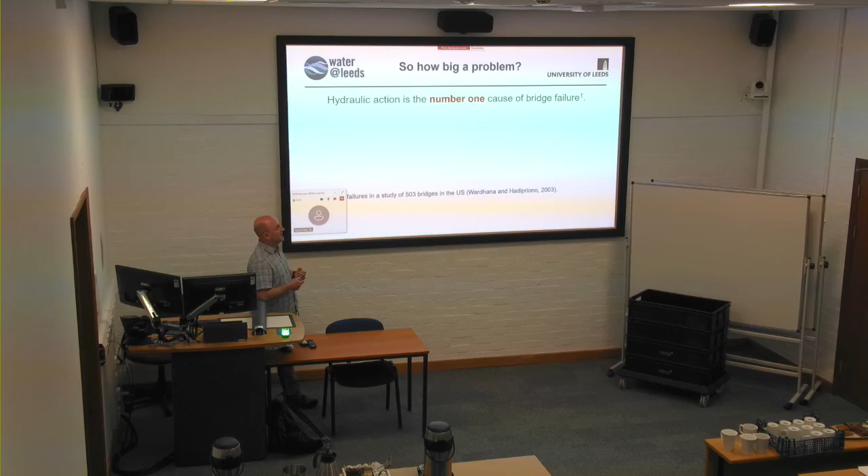But when we look at the research into bridges, what we find is that hydraulic action - essentially the water interaction with the bridge, whether loading from hydrostatic forces, or scour, anything to do with the water context of a river bridge - is still the number one cause of bridge failure. That in itself makes us wonder whether we really know the full picture yet.

The other interesting thing is that even where we have a process to assess the risks to a structure like a river bridge - for example, we work with Network Rail, and they have a whole process to assess risks and rank them into low, medium, or high - what we find is that even bridges that fail are quite often assessed as low risk. So you start to think, well, if our risk assessment procedures are not allocating bridges correctly, are we missing something?

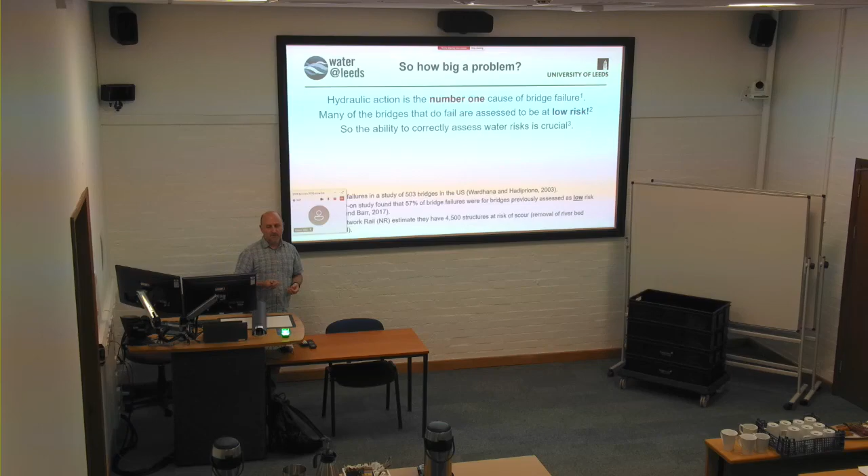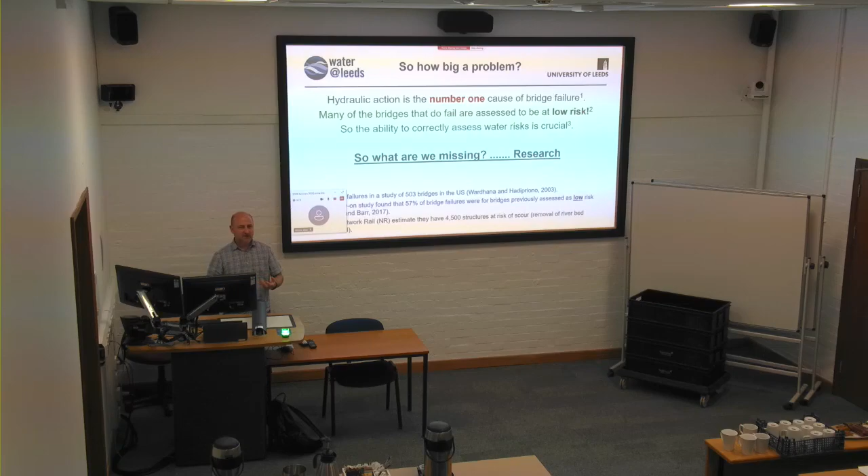And there are a lot of bridges - we're talking about thousands, tens of thousands of bridges across the UK that different asset managers look after. So that's the context of this talk: what are we missing? Is there some amazing research that we should be doing? That's kind of where this came from as a project, I guess.

So the location of the study is Dominica, in the Caribbean. It's known as the Nature Island, and it's very pretty. It's quite a small island, only 750 square kilometres. It's very steep, with three main volcanoes in the centre - a very steep system. And it has 365 rivers, one for every day of the year, as they like to boast.

And so there's lots and lots of bridges. So you can probably see where the context of this is going a little bit. And unfortunately, hurricanes are very common in the Caribbean. And what we're interested in this talk is how these bridges perform under those hurricane conditions.

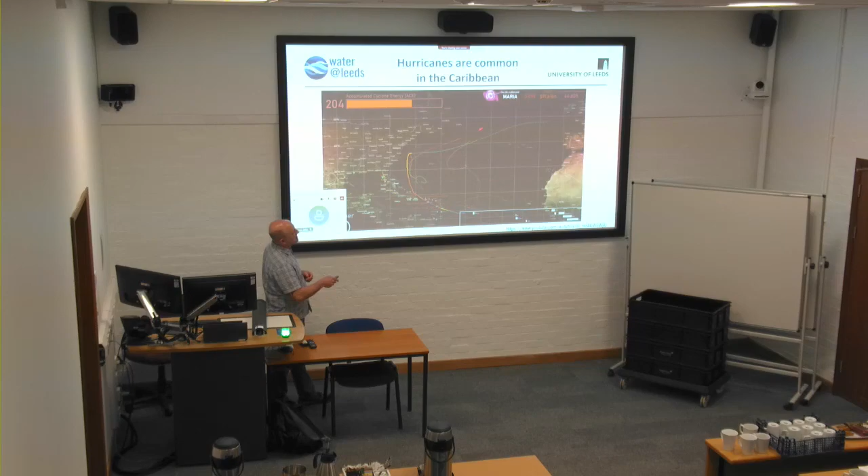So here's the path of Hurricane Maria, which went across the Caribbean. Interestingly for later, notice that the tail end of the hurricane heads towards the UK, so that will come up later in the context. Although we're studying Dominica down here, we're also interested in the fact that the tail end of hurricanes ends up hitting the UK.

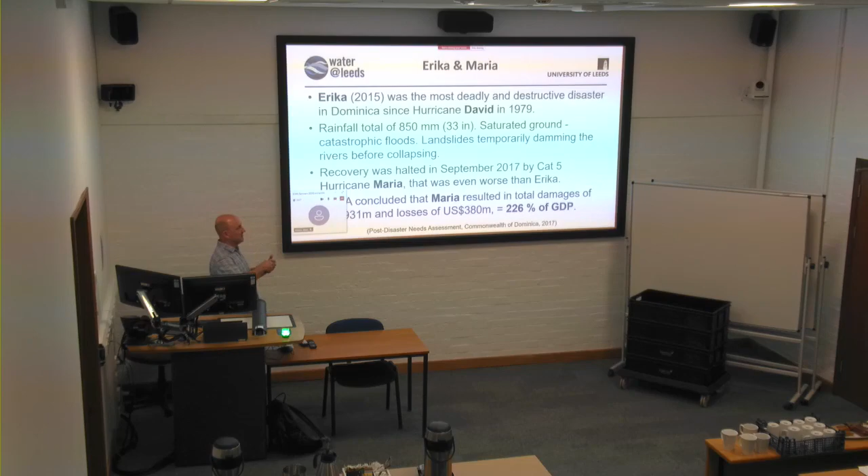So in the context of this project, it was about 2019 we started, we finished about 2022, so it was a long-term project. Just when the project came in, the island of Dominica had experienced a tropical storm, not a hurricane - there's a subtle difference, but essentially it's a very extreme weather event, lots of rainfall, slightly less wind in the case of a tropical storm, but similar intensities of rainfall, 850 millimetres in about 3 days.

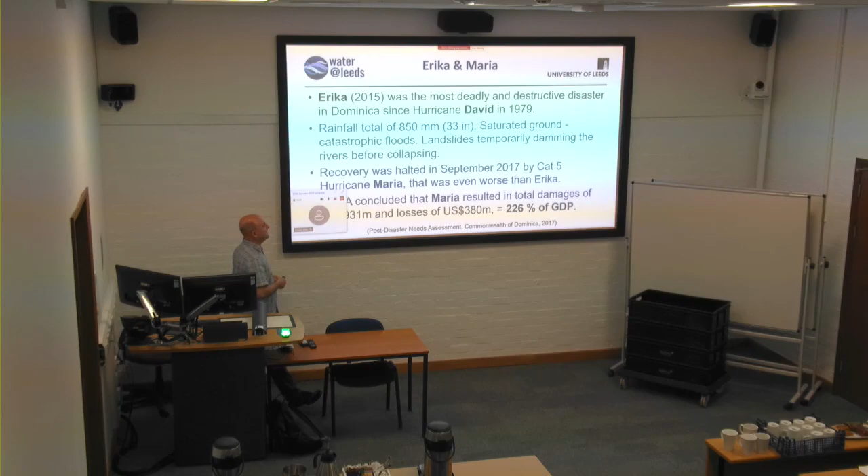Lots of landslides, damming rivers, collapsing, and so catastrophic floods. Unfortunately, as they were trying to recover from that, they were hit by a Category 5 hurricane, Maria, in 2017. So they were just starting to get themselves back together, starting to reconnect the road system and so on, but unfortunately got hammered by Maria.

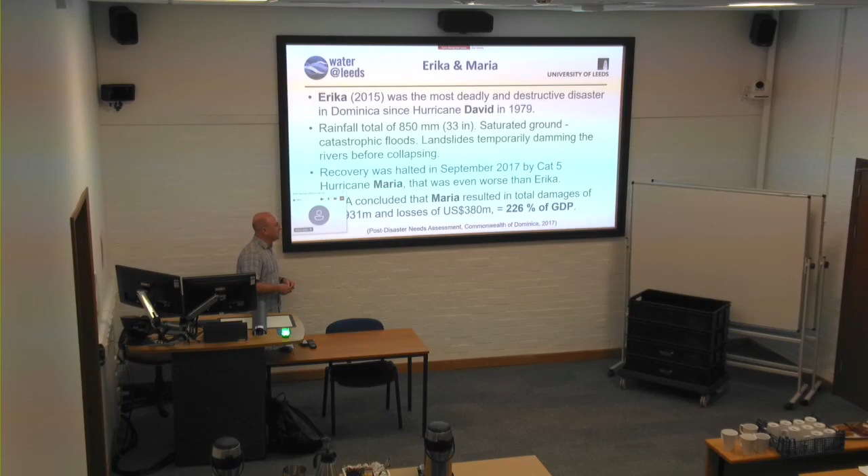And they estimate from the post-disaster needs assessment that they put together after these disasters that something like 200 plus percent of GDP was lost during that event. So you can imagine if you're a country and you're basically set back 2 years in terms of your income and your investment - a huge impact on the island.

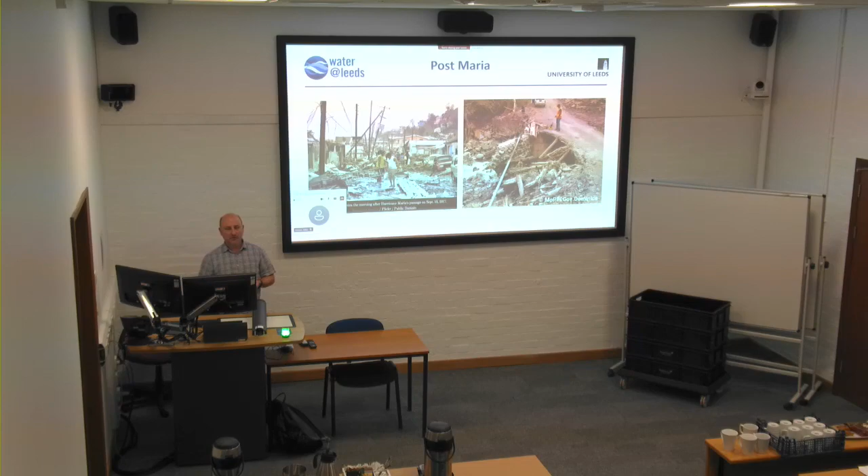And another picture of another bridge - this one survived. But notice, let me go back one - notice the large boulders here that were brought down, and then a lot of the woody debris. These are the trees blown down during the hurricane, get swept into the river and then clog up the bridges as well.

This is the capital Roseau. This is one of the bridges looking up to one of the other bridges. I'll just show a video - hopefully this will come up on the other screen.

Hopefully everybody can see that. So this is about 2 weeks after the hurricane. We're looking at the main river in Roseau, which is the capital, and you can see the debris blocked up against the river. We'll come back to that log there.

But the sediment as well is built up, so the channel was a lot deeper than this previously, so the clearance now underneath the bridges is very small. And you can see woody debris that's jammed up against the bridge, piled up against the piers. This log's a particularly important one that we'll come back to later, but all this woody debris has been swept into town - that's arrived on the flood water that filled the town.

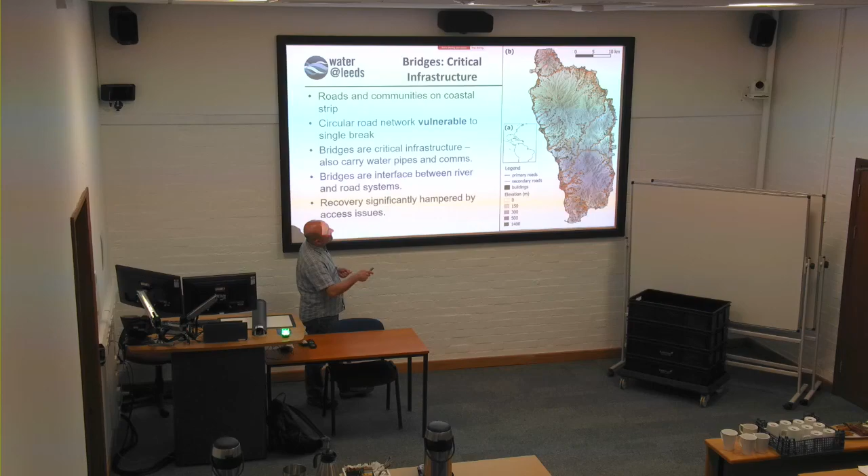Okay, so you can see the kind of challenge for bridges. But if we take a step back and look at the island generally, you can see this is the road network here in the island. You can see that because it's quite steep, there's about 3 volcanoes here, so very steep, about 1,400 meters high in the middle of the island.

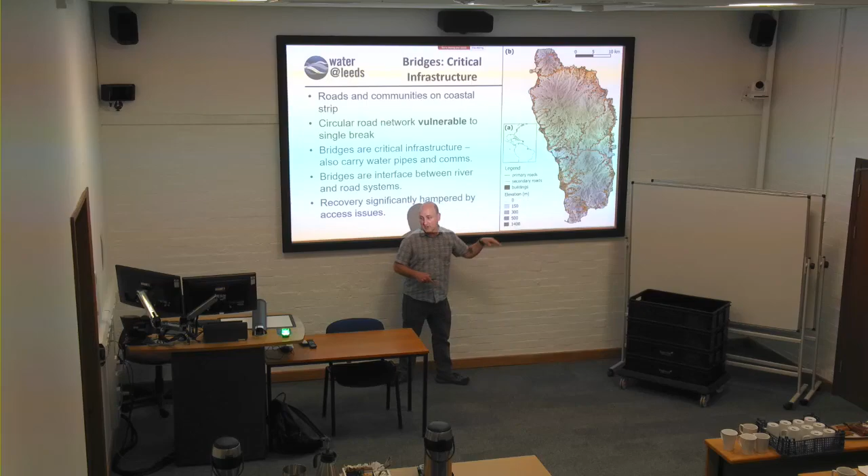And what you end up with is a road system and a sort of community concentration along the coast here. So you get lots of people living on the flat areas on the coast, which are also alluvial fans if you're into geomorphology - essentially a lot of sediment deposits over the years, and they are prone to avulsion as well, so the river channel changes quite quickly and quite frequently during these sorts of events.

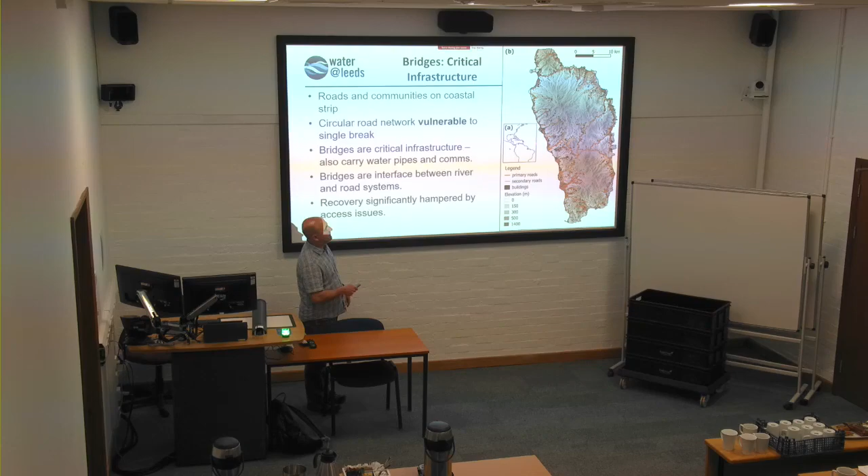And of course, because they've got this kind of circular network, there's only 1 or 2 roads that go across the island, and they take a long time to get over because they're quite steep. Any break in that road network disrupts access, and that was a huge problem during the recovery phase - getting to communities where they needed support was a real problem.

So how did I get involved in this? This came about as part of a World Bank project. They were looking, post-Hurricane Maria, to make a loan to the island to help them rebuild their infrastructure. But they were acutely aware that they'd already experienced something similar two years before. So the question was, are we just going to keep building bridges and having them washed away? Or is there something we can do about it? Is there something we can learn from the experiences of this context?

I got involved initially as a kind of hydraulic reviewer of the consultants' work that was going on. I then convinced them that it would be useful to have a resilience research project alongside, where we would try to gather our understanding of what actually happened and what could be done about it in the future. How could we improve resilience, particularly of bridges?

They were also quite interested in using drones to fill data gaps. There's not a lot of data available on the island. Certainly at the time there were no river gauges, there were one or two rainfall gauges, but they had intermittent records, so there was a real problem with data. That was kind of the context for this problem.

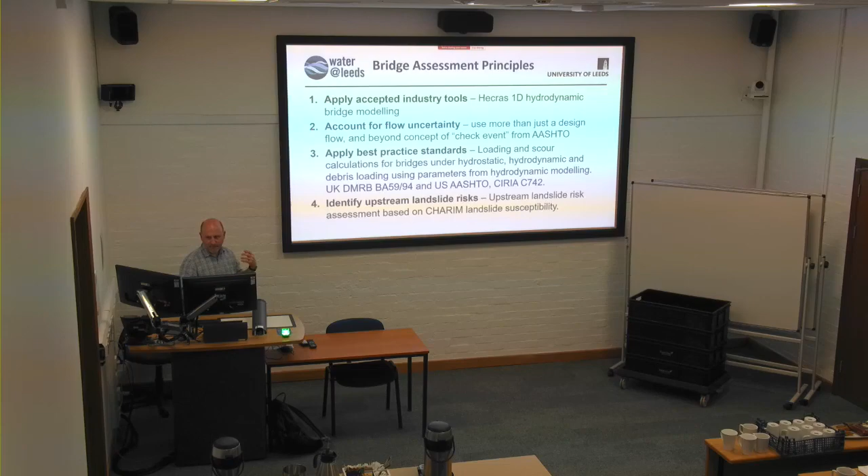So we set about studying this as a learning exercise, and in negotiation with the World Bank, these were the assessment principles we came up with. They were very keen on using whatever the consultants were using. They didn't want us to use any fancy research models. They said, you've got to follow the practice that the engineers are doing that build these bridges, and then we can learn from that process.

So we ended up applying, at the time, HEC-RAS 1D hydrodynamic modelling, which works quite well for these bridges. They're quite simple river systems, so 1D cross-sections work quite well.

They wanted us to look at flow uncertainty. At the time, you would have a design event, which might be a 1-in-100-year flood peak that you would then design your bridge to. AASHTO guidance from the US had brought in something called a check event, which is a much bigger event than your design event that you're supposed to check your design under. We were interested in doing something more than that, which is to model it under a whole range of flows. I'll come back to that.

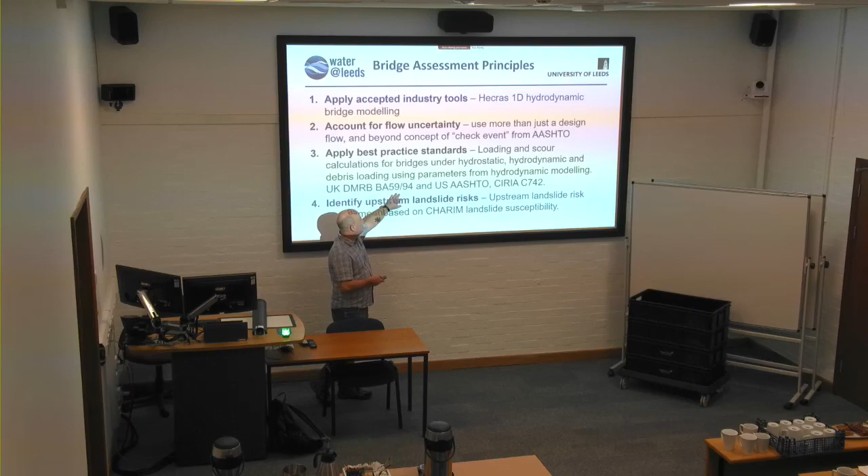In terms of calculating loading and scour for the bridges, we followed, at the time, the Design Manual of Roads and Bridges, BA 59/94. That's now been replaced, last year or the year before, but I'll come back to that. We also looked at US AASHTO guidance as well.

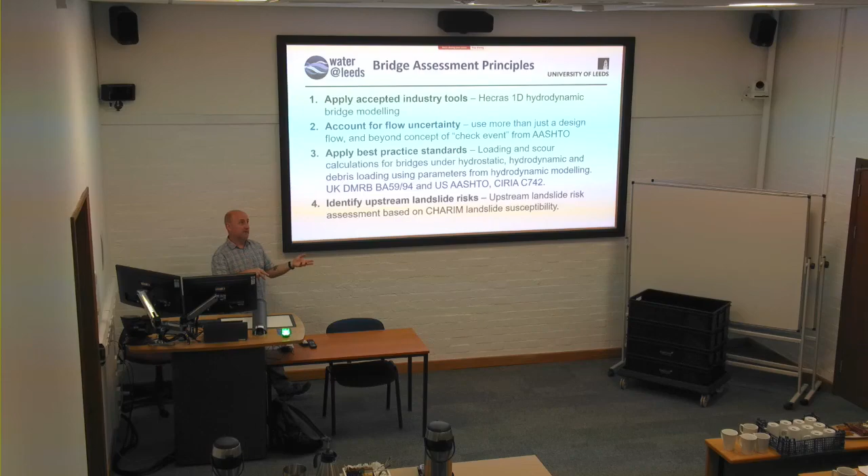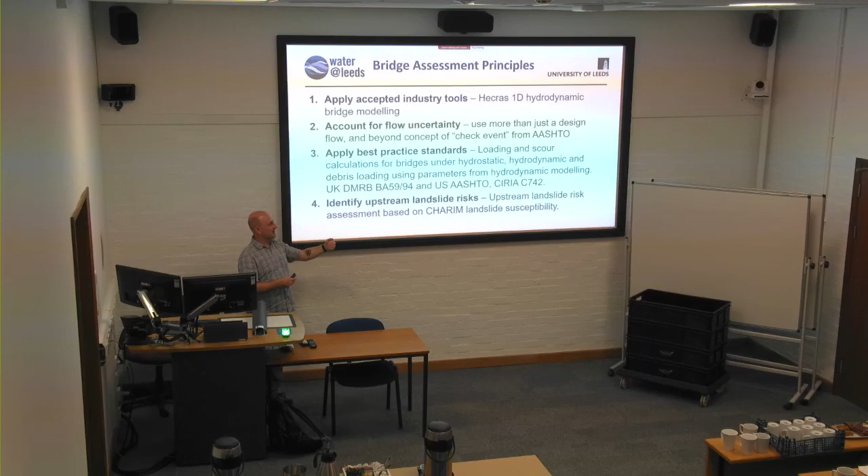They were particularly interested as well in identifying upstream landslide risks. They'd had a hydrologist do a modelling study and then a field study where they'd gone and measured wrack marks, and worked out that the flows in some of the rivers were three or four times what the model was predicting for that rainfall. It wasn't a model calibration problem - there was a process happening that wasn't in the model, which is these landslide dams building up water behind them, then bursting, producing this huge flow downstream which wasn't predicted by the model. So quite a complex situation.

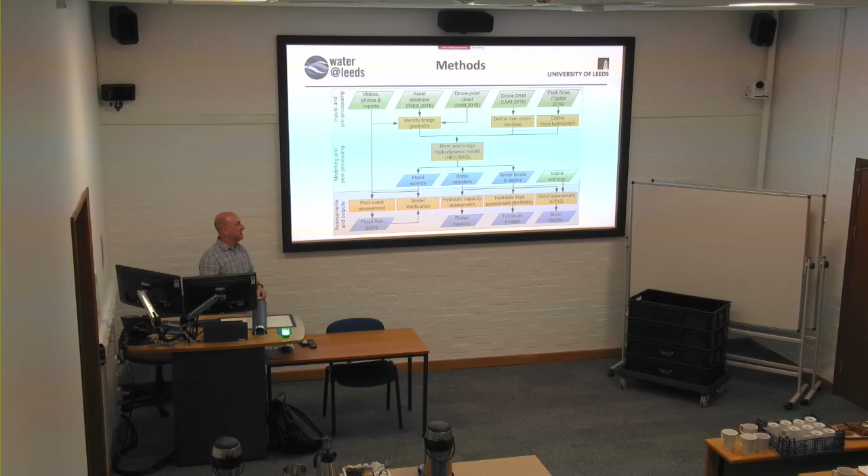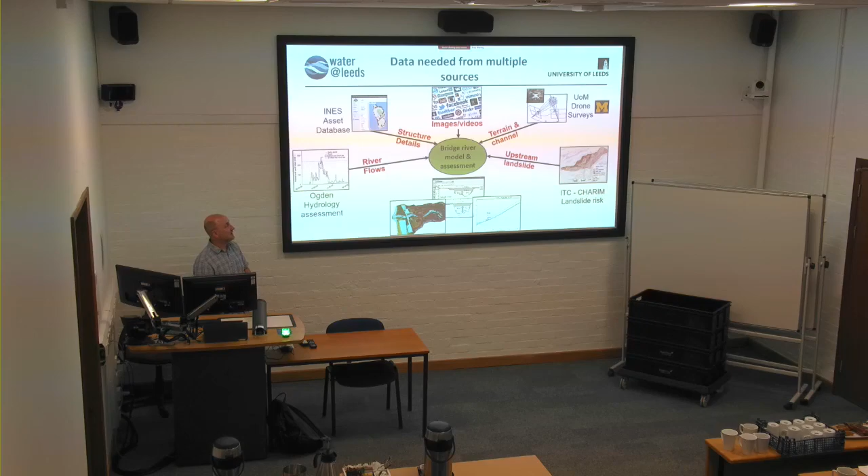Here's another way of looking at that. We had to be quite innovative in trying to get information from wherever we could get it. It was quite manual in collecting a lot of the data, certainly from social media and things. But as you saw from that video, there's a lot of information out there if you look.

So the starting point for the river modelling was to build a digital surface model, and we were working with the University of Michigan, who had a drone expert. At the time that was quite a new thing, to create your digital surface model, and he was doing capacity building with the local government office as well, so that they could do this in the future.

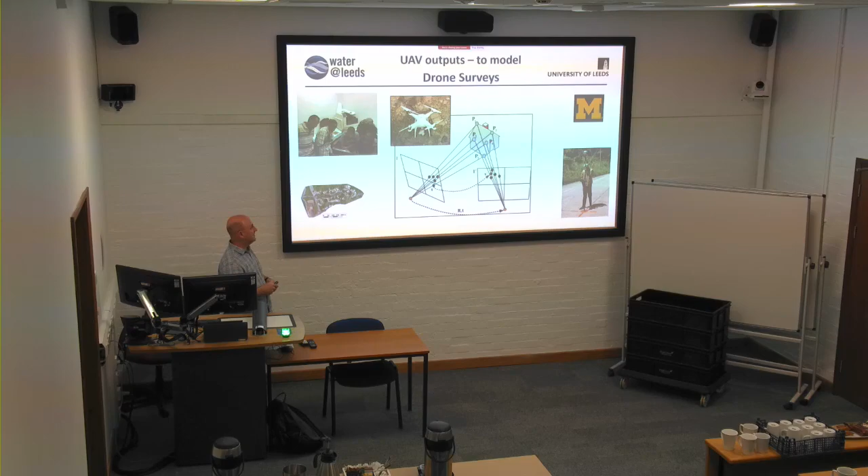So they would fly a drone above the reach of interest. Here we've got a bridge, this is the coastal edge, and this is the road that goes around the island with one of the bridges on it. They were flying drones before Hurricane Maria, which was quite interesting - the timing was like a month before the hurricane arrived. So we'd actually got it before, and then they also did some studies afterwards, but we weren't looking at that specifically - that was more of a geomorphology assessment.

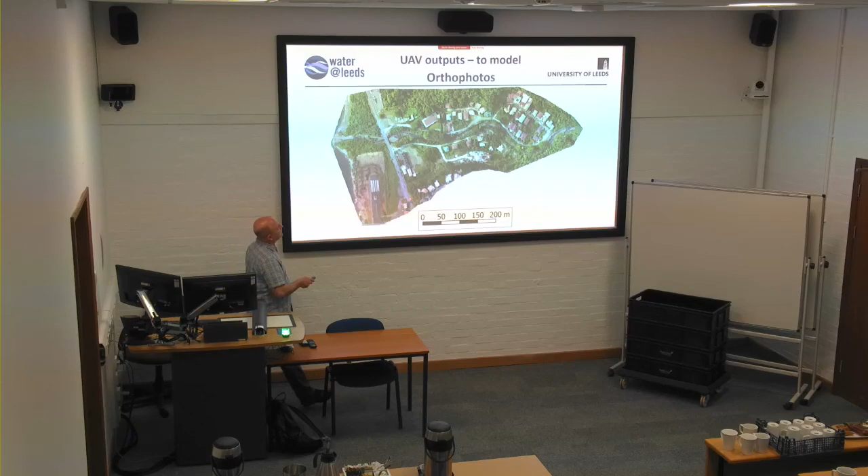But they produced these ortho photos, very high resolution, that we could use. And then they processed those to create a digital surface model, and you can see that we've got the bridges in that model.

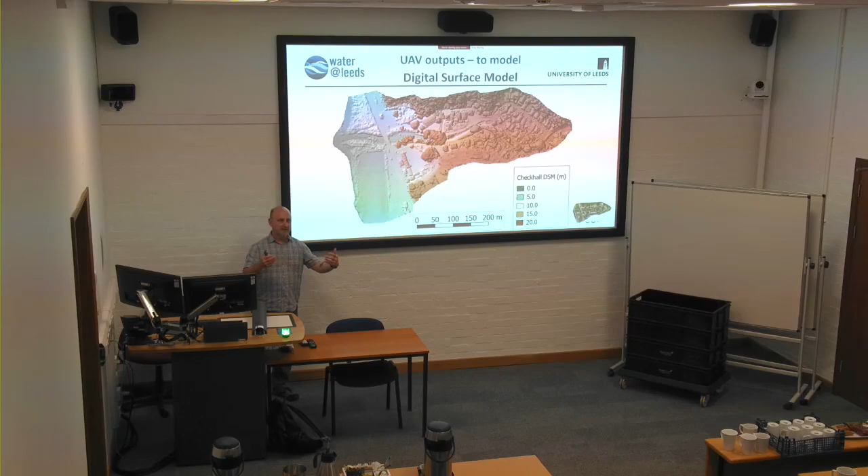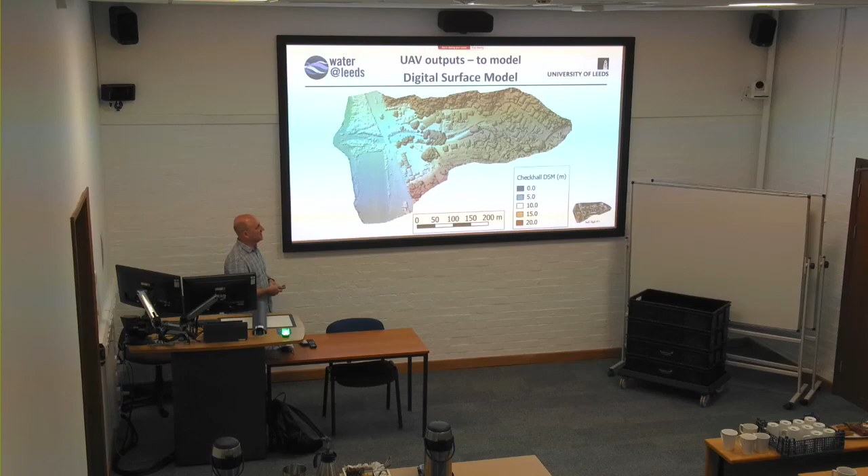This was slightly new to me at the time. I was quite used to commissioning a river survey, where people would go out and do a cross section here and so on, and we would have a very good definition of the channel. So this, although it was much higher resolution and more 2D, brought all sorts of issues to do with trees blocking the river channel view. So we had to do quite a lot of manual editing of these. Although it was a great new data set, it caused a lot of headaches in terms of manually editing everything, so it wasn't quite as automatic as we'd hoped.

But we were able to use that to create a 1D river model. You can see the bridge here in the model, so it's a simple cross-section thing. We would put a flow in at the top end, it would calculate the water level, and we would also have the structure explicitly in the model, which I'll show you here.

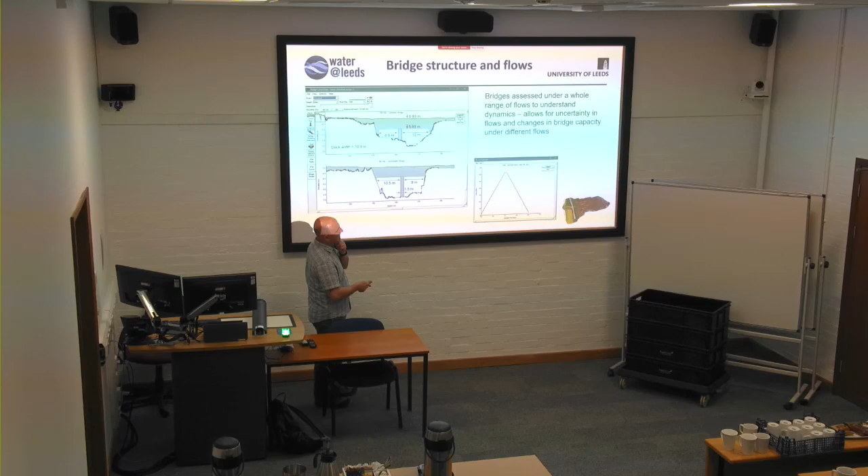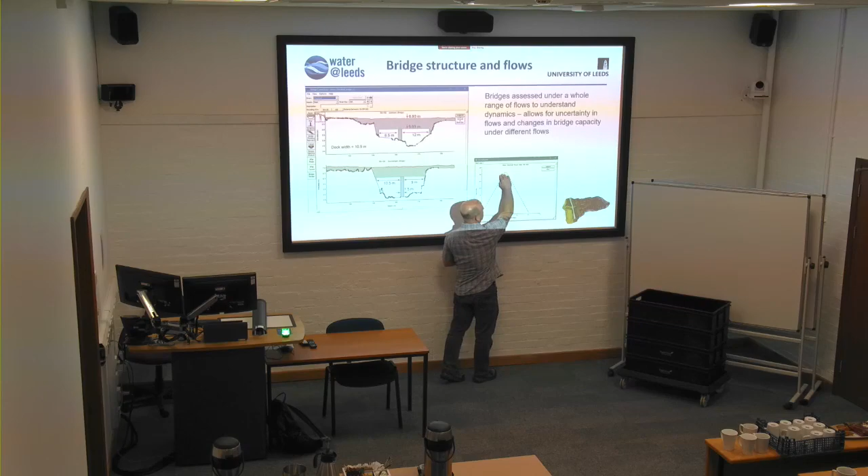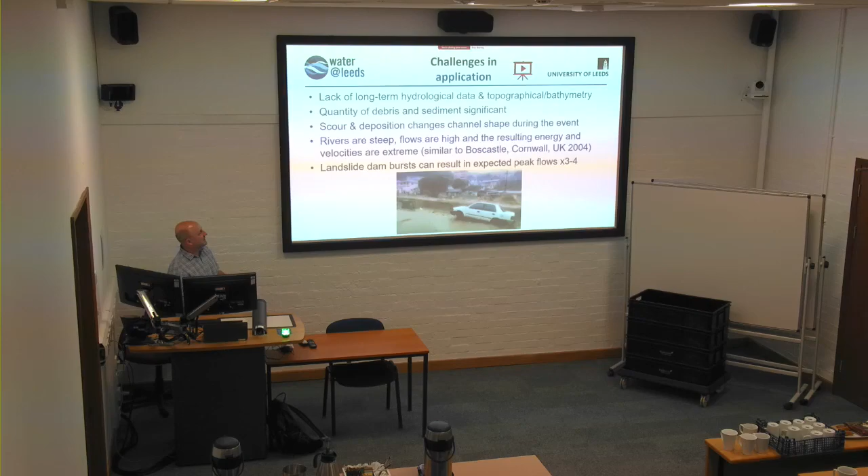So some of the challenges we had, already mentioned, lack of data - often a serious challenge. The quantity of debris and sediment was massive, you've seen the photos and the video. Scour and deposition changes the channel, and the modelling tools we're using do not allow for the channel to change, or they traditionally haven't - they have evolved since then. And we get these very steep channels, and I'll show you a video of one of the rivers during Erika. Let's see if I can find that.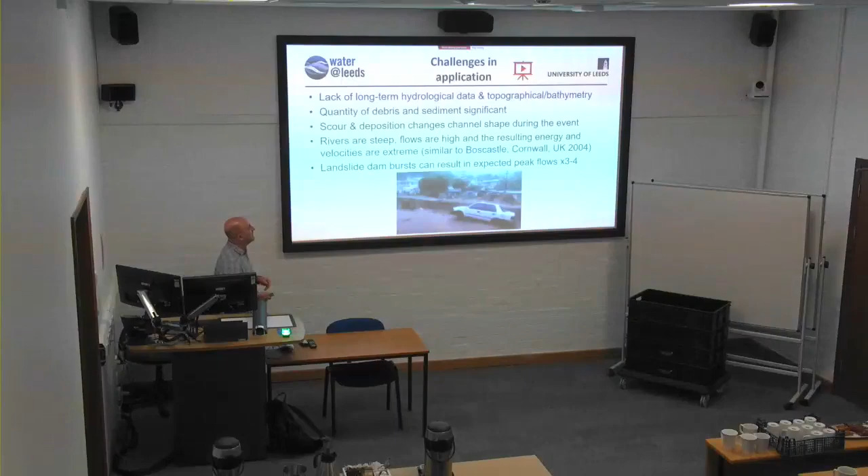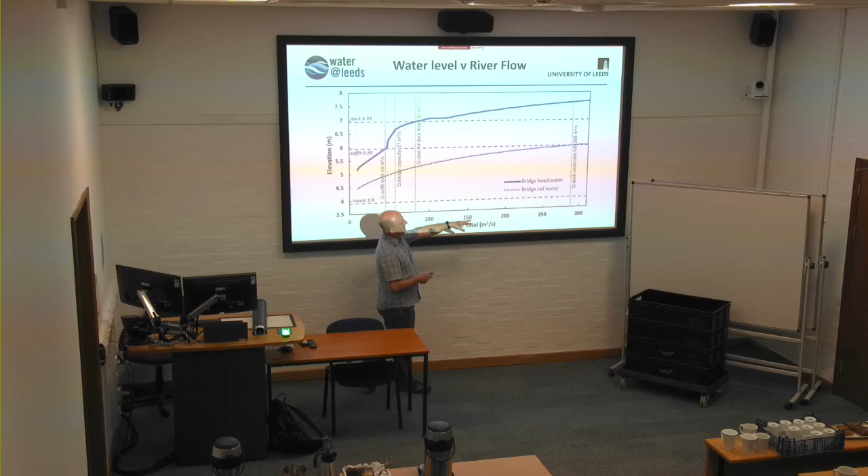Going up to 300 cubic metres per second. This is only a small river, by the way, only about 4 metres wide or something. And then you've got the elevation of the water surface on the y-axis. You can see I've plotted the deck level and the soffit level of the bridge, the top and the bottom of the bridge deck, and the invert of the channel as well.

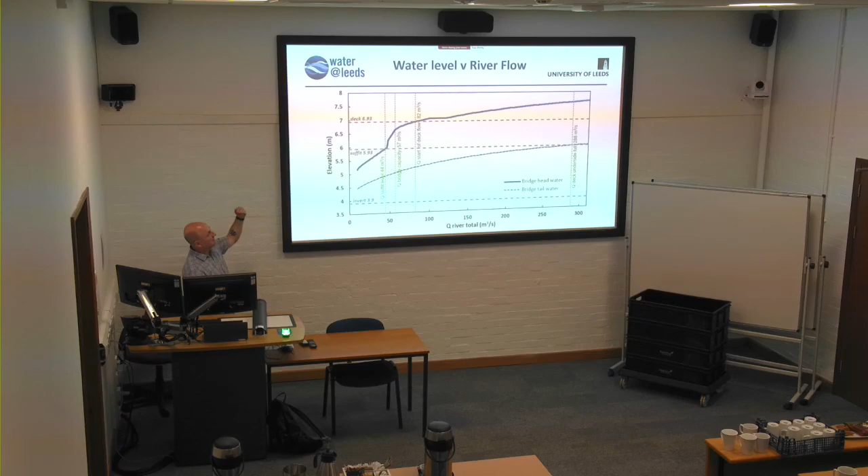You can see two blue lines. The top one is the headwater, so that's the bridge water level, or the water level upstream of the bridge deck. And the dotted line is the water level downstream of the bridge deck. By modelling it under the whole range of flows, we're able to work out exactly what goes on during the event.

You can see as flow increases up towards 50 cubic metres per second, water levels go up fairly linearly, and then it hits the soffit, and essentially water becomes constricted through the bridge, and you get this backing up of water. The afflux builds up until eventually the water goes over the top of the deck at about 82 cubic metres per second.

So you can see what's going on there. There's a kind of active area of flow where things change rapidly, and then you can see the downstream water level also eventually reaches the underside of the soffit. Because it's quite a steep river system, that doesn't happen until quite high flow, and by that time you've got a huge quantity of water going over or around the bridge system.

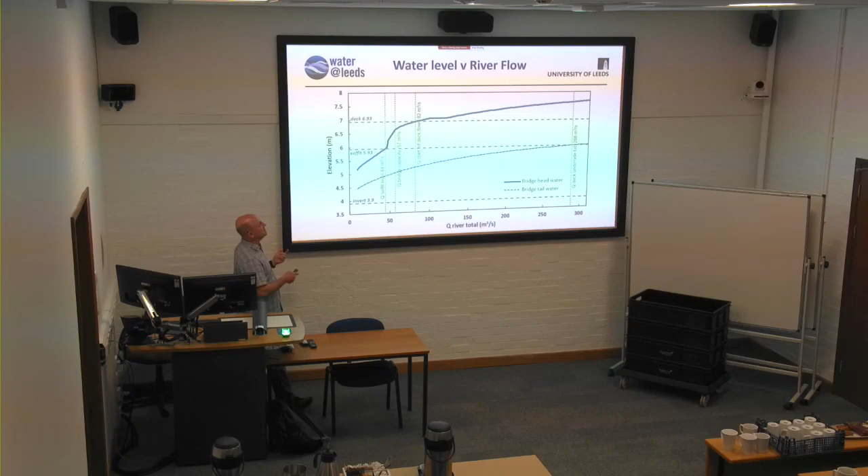The reason this was quite important is that the procedures for assessing, for example, scour, ask you to pick the peak velocity that the bridge experiences at peak flow. But actually the reality is, from what we found, you could get higher velocities before this condition. Often the highest velocities were here just before it hit the soffit level, because once it hit the soffit, water was backing up and essentially the velocity drops.

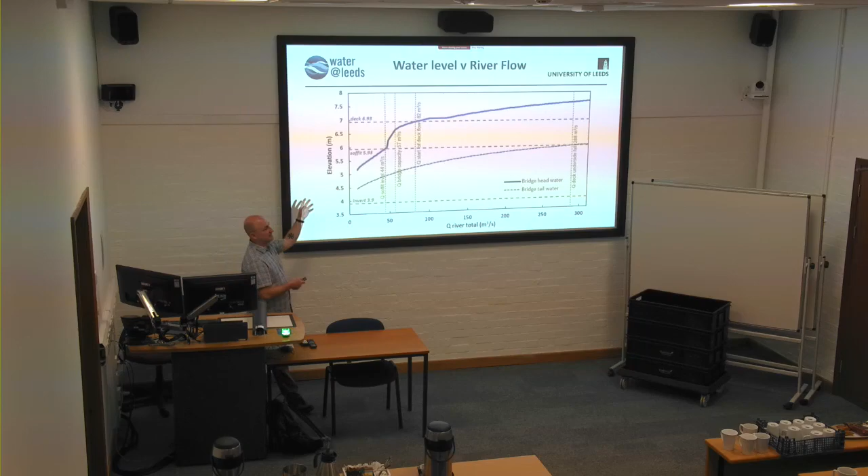And actually that was at the point where these bridges were starting to fill with sediment as well. And we've not even looked at accumulation of debris, which adds a whole nother complication to this sort of thing. But anyway, when we look at the bridge results for all of the bridges we looked at, 19 bridges on 9 different river catchments, this is what we find.

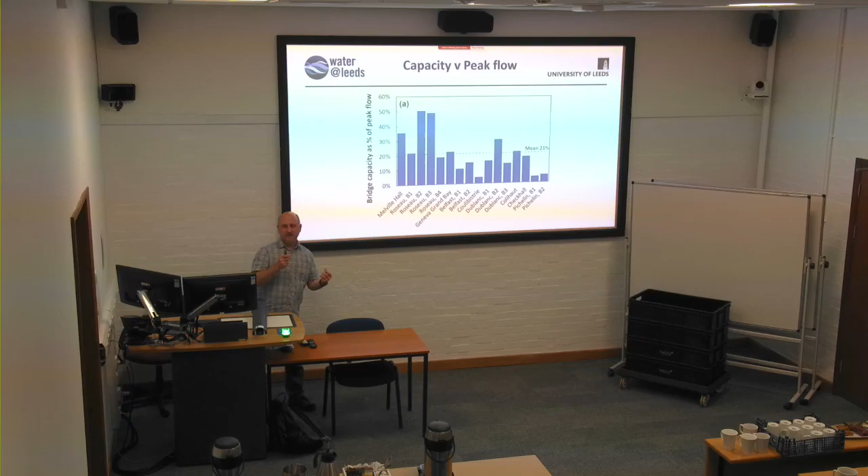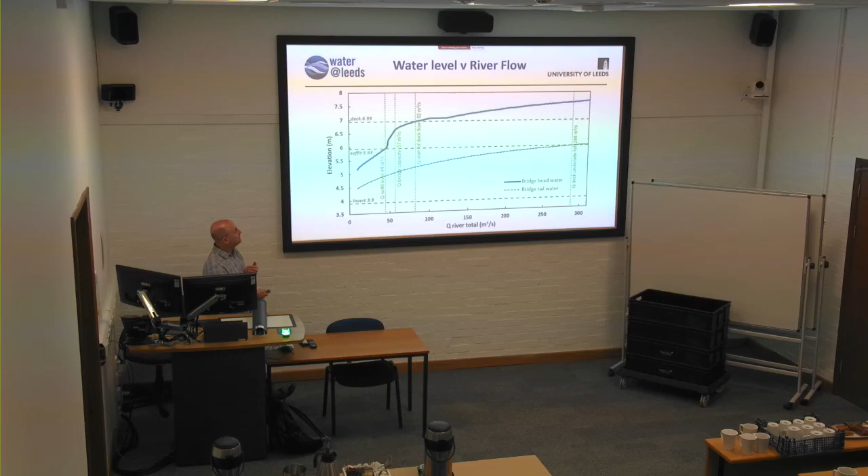So this is capacity versus peak flow, with capacity defined by the point at which it reaches the soffit. What we find is that the mean is about 23% of what the expected peak flow was during Hurricane Maria, which was obviously a significantly large event in terms of flows.

What we found particularly interesting is that one of the bridges, Bridge 2 and Bridge 3, these are the two newest and biggest bridges on the island, designed by international consultants who knew about the hurricane history of the island. But even those bridges, one of which had only been completed the year before, only had approximately 50% of the capacity required to carry that flow through. We'll come back to that a little bit.

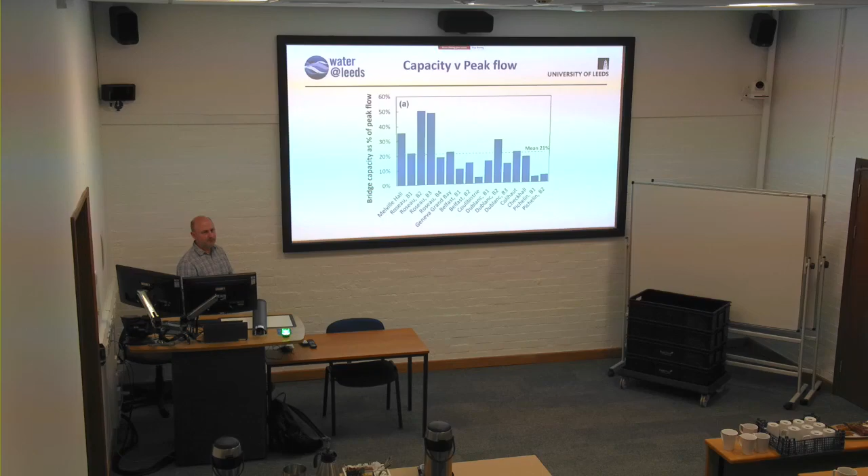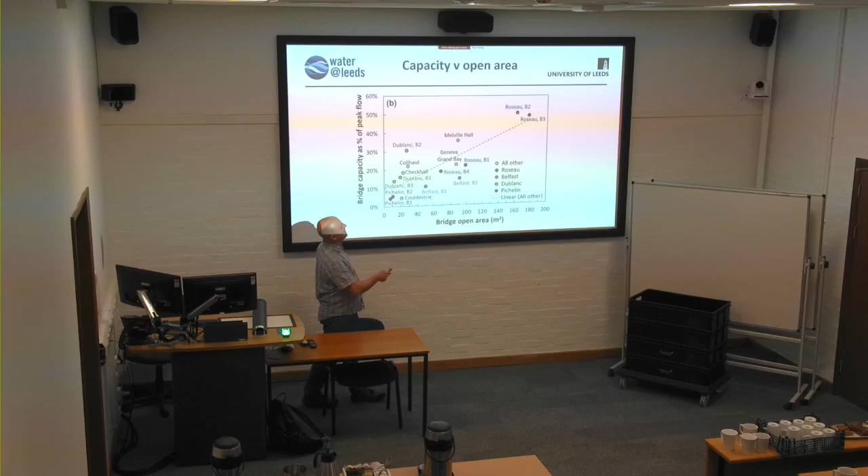Here's another way of looking at it. This is capacity versus open area under the bridge. Perhaps not surprising: the bigger the bridge, the more open area there is, and the bigger the capacity of that bridge. You can see a lot of the bridges are quite small, really. These are not massive bridges.

These have about 3 piers and probably 50 metres, and these are more like 10 to 20 metres span. So most of the bridges on the island are quite small. Only a few are really kind of big bridge systems that we're used to, I guess.

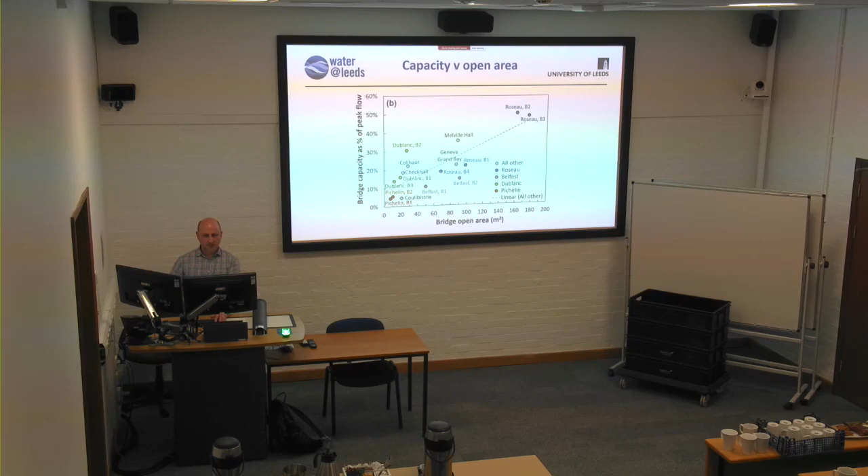You seem to have... okay.

So the other thing we were looking at was forces on the bridge. We were interested in whether there were specific elements or features of bridges that cause problems, so we measured what the forces were on the bridges using the model to give us the parameters for the calculations.

We're interested in 4 particular forces here. We've got hydrostatic force, which is just the pressure force against the bridge structure. We've got hydrodynamic, which includes the velocity, the momentum element of the flow. And then we also have a hydrodynamic force on debris.

This is assuming some debris is collected on the bridge, adding additional force. The final force is a debris impact force - if you've got a large log floated down the river at high velocity that hits the bridge structure, that imparts a debris impact force.

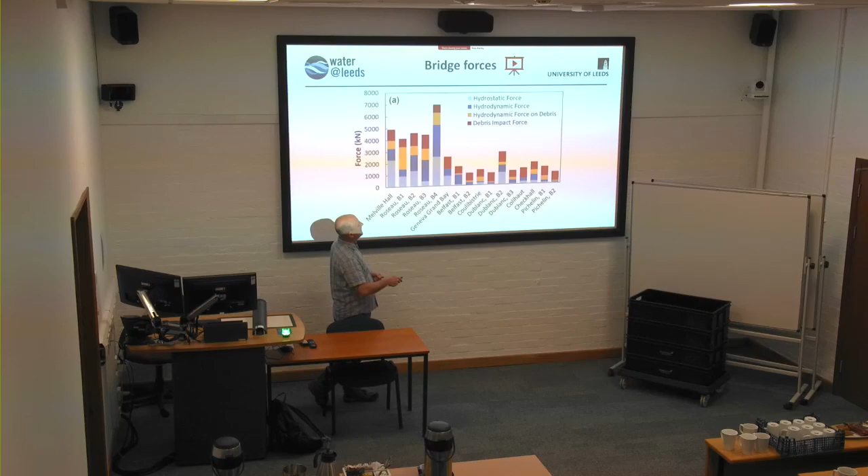So if we add all those up together, we can see the kind of forces the bridge decks are subjected to. You can see we've got quite small bridges down here where the hydrodynamic and hydrostatic forces are quite small, and then all the main bridges on the island. Melville Hall is near the airport, so that's quite a big bridge, and then you've got the 4 bridges in the centre of the capital.

And you can see, although they're the same span, one particular bridge kind of stands out, and this is the most upstream bridge. I will talk about that in a little bit.

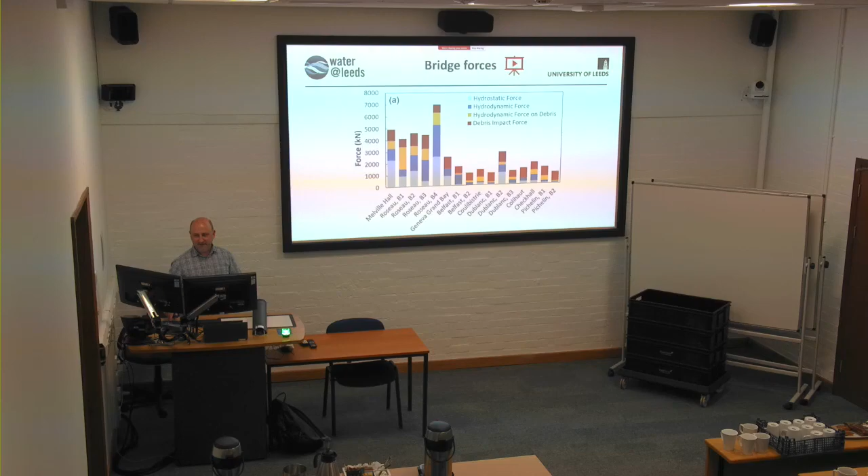But essentially what we found was that it had a solid concrete parapet of about 1.5 meters high. It was the only bridge that had this solid concrete parapet, and that essentially gave us this high hydrodynamic, the hydrostatic force against the bridge. That was interesting, and it was also the oldest bridge, and it had been around a while, so it's obviously reasonably resilient, but not perhaps the best design from that point of view.

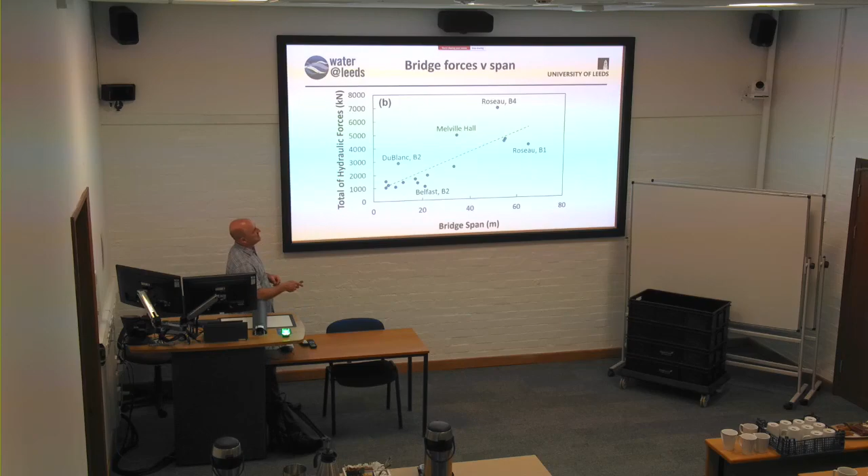Just another way of looking at the same results. Here you've got a bridge span up to 60 metres here, and then most of the bridge is quite small here. So obviously the bigger the bridge, the more forces.

As well as the modelling, the other thing we did was try and get hold of lots of social media posts. There was one particular person on the island who had a new drone and he wanted to record everything. His outputs were hugely important for this study because he flew a drone across the island, went to each place, and also interviewed residents on his videos. His channel's called Aerial Dominica if you want to go and have a look at it. That was hugely important to our study, so we used his videos essentially to do an assessment of what happened to these bridges.

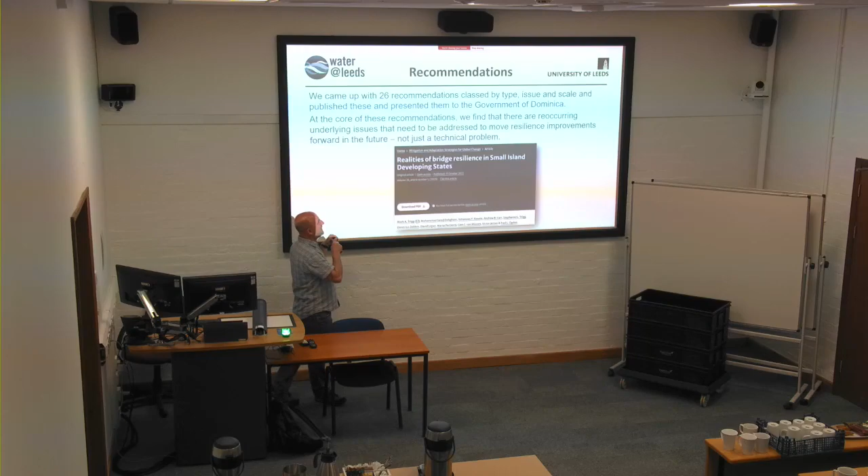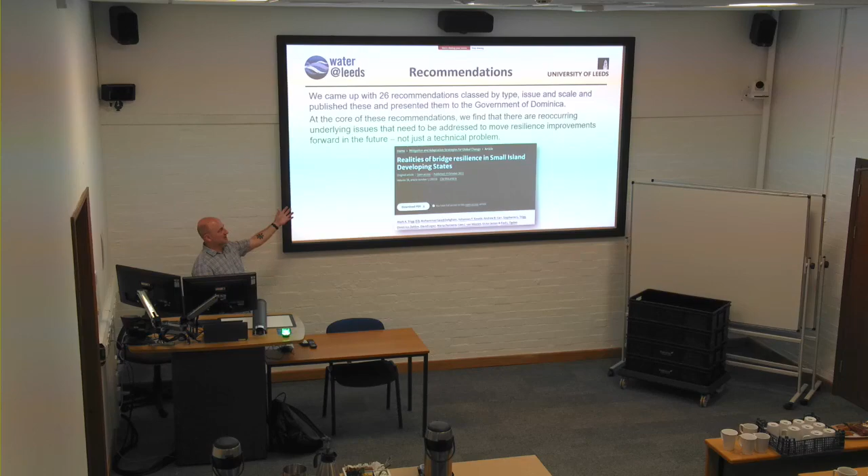But at the core of the recommendations, we found there were a whole range of underlying issues that needed to be addressed so we could move this resilience problem on in the future. And it wasn't really a technical problem. Going back to my first question: do we know how to design bridges? The answer is yes. The reality is that in this context it's very complicated to design and build a bridge that will be resilient, because if you want to build an ideal bridge in this situation, with unlimited money, you just build it high enough and out of the way and it's not a problem. But you can't build every single bridge on the island like that, because it would use the whole GDP of the island.

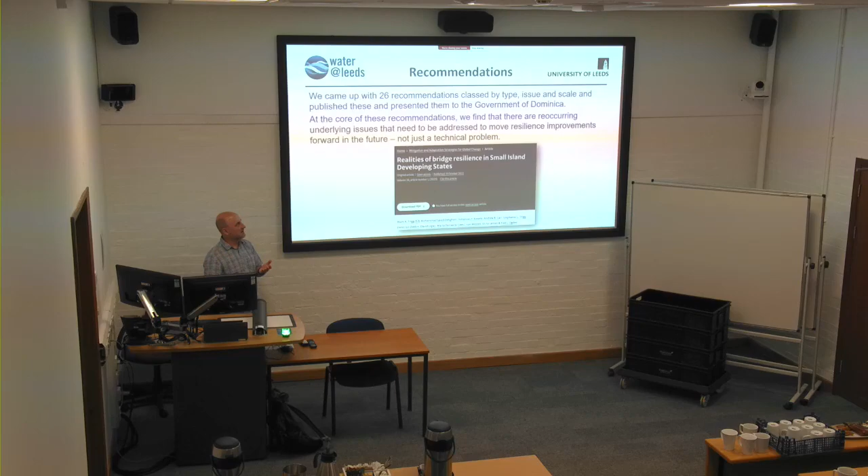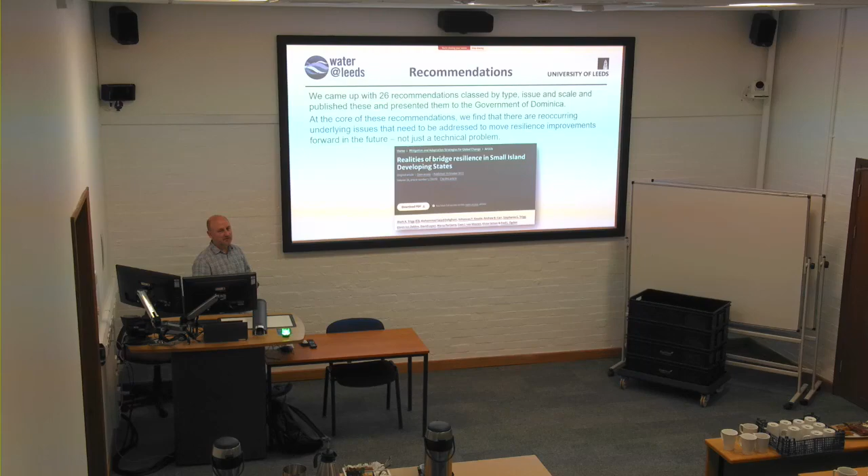So there's this balance between risk and resilience. But we found it's quite interesting that there were lots of little details about how things were designed on the island that could be improved. Things like each international consultant would have a different set of standards and apply it, so road widths would change from metric to imperial depending on which standard that particular consultant had used. And they didn't have any of their own local standards, partly because technical capacity is quite small on the island. So developing your own standards when you've only got a small population is unlikely.

So, final conclusions, if I summarise these 26 things: you can't really build a bridge big enough for the flows experienced on the island. Even where they'd thrown several million at this new bridge, it still wasn't big enough, even though they were very confident it was well designed, and it was a nice bridge. I, as an engineer, would look at it and go, yeah, that's a good bridge. That's the one, by the way, with the big log across the corner. And their whole abutment dropped by about a metre, so they had to rebuild that.

Bypass flows, I've mentioned them quite a few times, this avulsion idea. They're always evident, so they always cause a problem, and they will happen. No matter how good your design of your bridge, you should expect bypass flow — that was our conclusion from that. And when they're designing the bridge, they should be thinking about the community living in the area, and that community should be involved in the process, because at some point that bridge will be overtopped, causing a bypass, and it's going to go through the residential area. So the design process kind of ignored that, I guess. We were saying, no, you should be thinking about including that and assuming it's going to happen.

The specific conditions are perhaps slightly unusual compared to the UK, in that they're quite energetic. But there are places in Exeter, the surrounds, Cornwall and Devon, that experience similar conditions, Boscastle and things like that - very similar kind of conditions, maybe not a hurricane, but very energetic and cause huge problems.

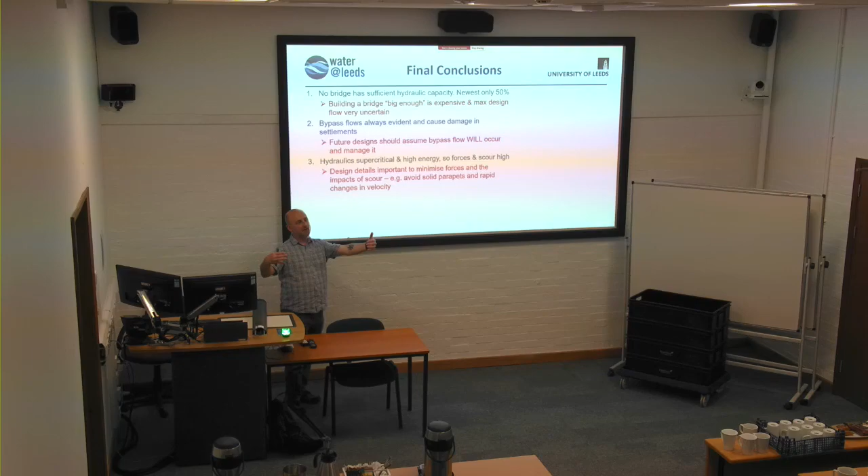And the details of the design were quite important. So one of the things that came out of this was something that's been used elsewhere - it wasn't something we'd come up with. It's this concept of a detachable parapet. So the parapet kind of stops people or vehicles going into the river system normally, but during a hurricane event, they become a trap for debris - debris just builds up against this and causes a problem.

As part of the initiative, the idea was to have parapets that could break off, and basically they could take a certain load and then they will just detach. And then they stop becoming a trap for debris. So that was adopted, so that was becoming a thing there. It's almost an acceptance that you can't control everything, but you can minimise the effect of those things.

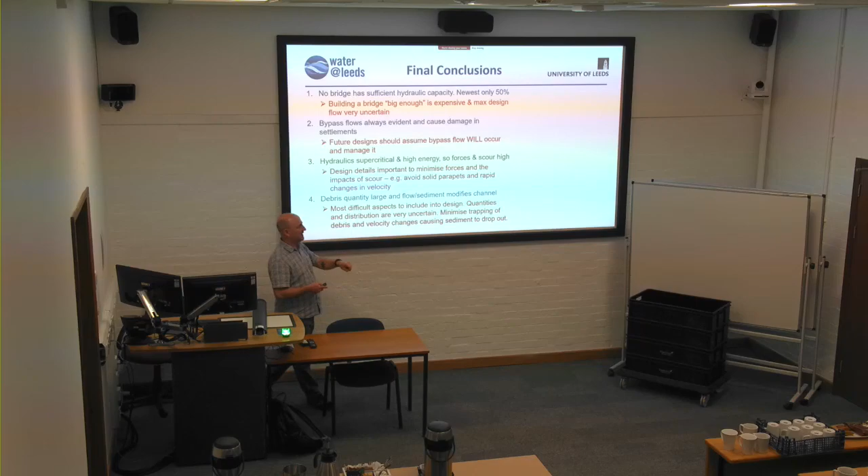And then finally, perhaps the most difficult thing to include in the design process is the dynamic nature of the event - the fact there's a lot of sediment that's changing the channel, there's debris which is unpredictable. I know there's been some good research here in Exeter on debris accumulation on piers, which is kind of the research that needs to feed into this step.

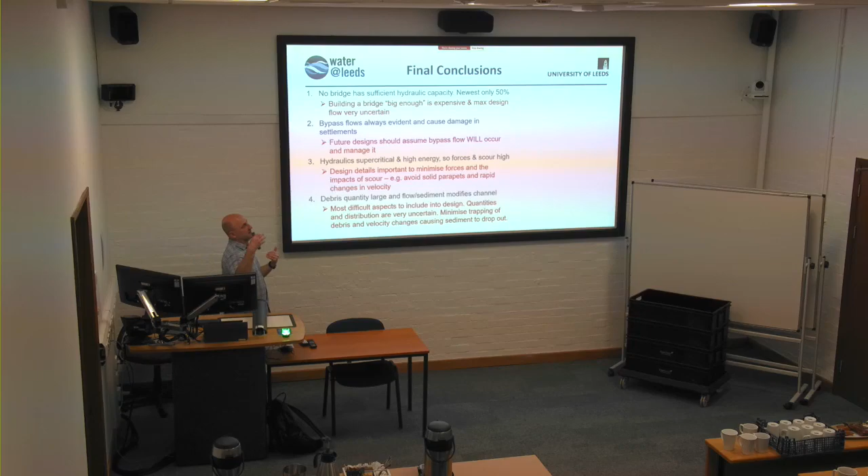This is particularly challenging. And of course modelling methods are now improved - now we use 2D, and a lot of them have the ability to model sediment as well. But even in this context, we did look at using sediment models. The challenge was that there wasn't the data for the bed material to feed into these models. So it's back to the data challenge again.

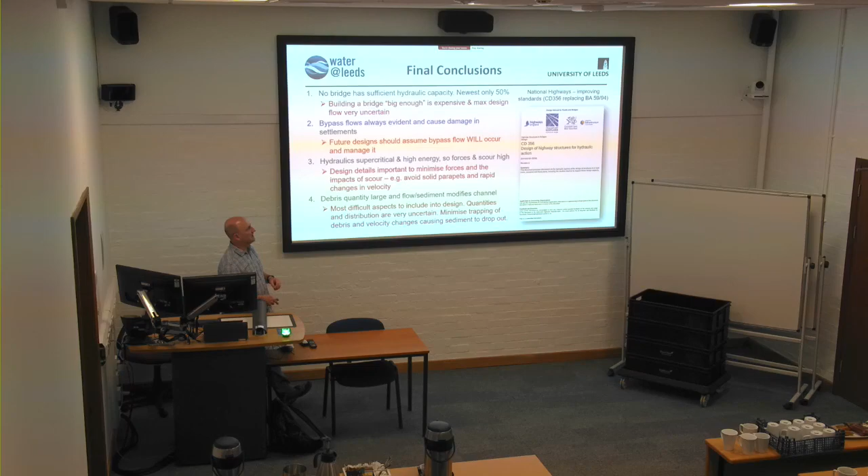So, coming back, just finishing off, this feeds into new guidance, new methods. We have a lot of conversations with National Highways, Network Rail, people like that - they're very interested in these kind of more extreme environments and what they can learn from it. So certainly the new guidance that replaced the one we are using, CD356, introduces a whole range of flows that you have to test against. So that was quite good.

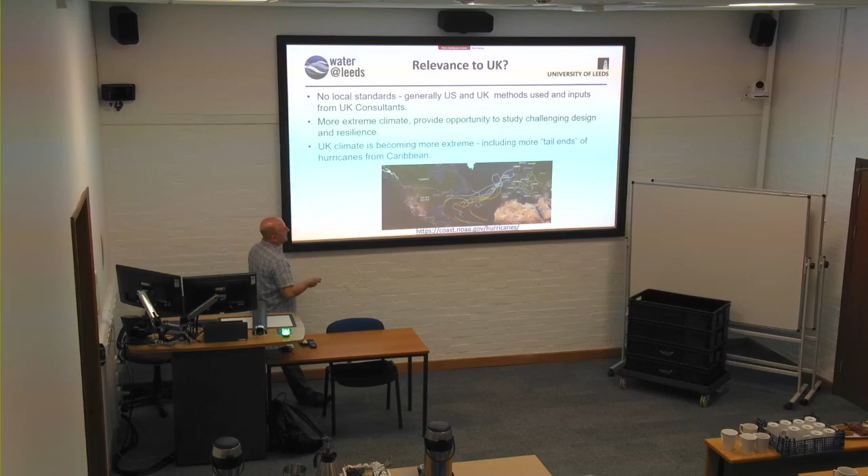And I mentioned there's no local standards, so you get multiple UK standards, I guess, and US standards being applied. So this kind of work is useful, I think, for highlighting that. I mentioned before as well, I made a plot here of some of the hurricanes that have ended up hitting the UK area here, and you can see that's something we have to think about.

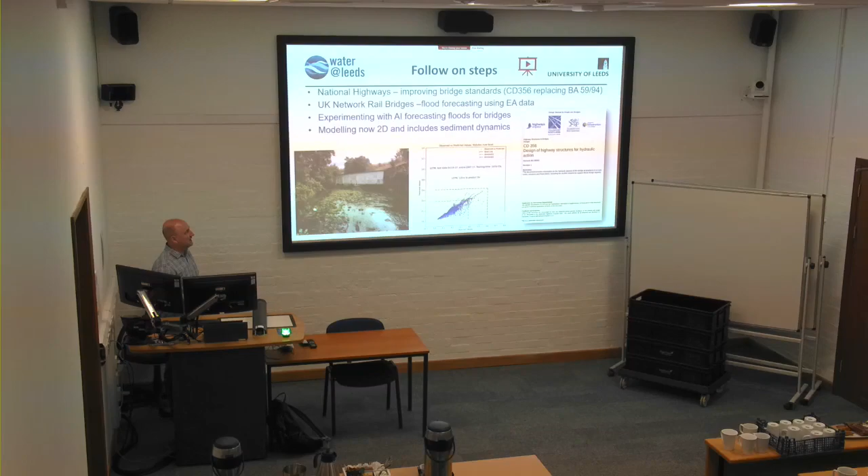I'm not saying we're going to hit a full hurricane, but we're working with asset owners in the UK, trying to advance this kind of understanding, I guess - see how we can improve things like flood forecasting for bridges and things.

So, what about the future? Well, the President, Prime Minister of Dominica, he made a vow that they would become the first climate resilient country in the world. And there's this headline about hurricane-proof. So they're quite serious about making improvements in terms of resilience. It's a challenging situation - I wouldn't say they've solved it in that sense, but they're heading in the right direction.

Interestingly, this is what NOAA's saying about the 2024 hurricane season, which is about to start, going into July, August, September time. Unfortunately, they're predicting twice the number of hurricanes that would normally hit the Caribbean because of the elevated sea temperatures providing energy for hurricanes. So I'm going to be watching very carefully to see what happens during that, and hopefully they'll avoid the worst of it. But anyway, yeah, an ongoing challenge.

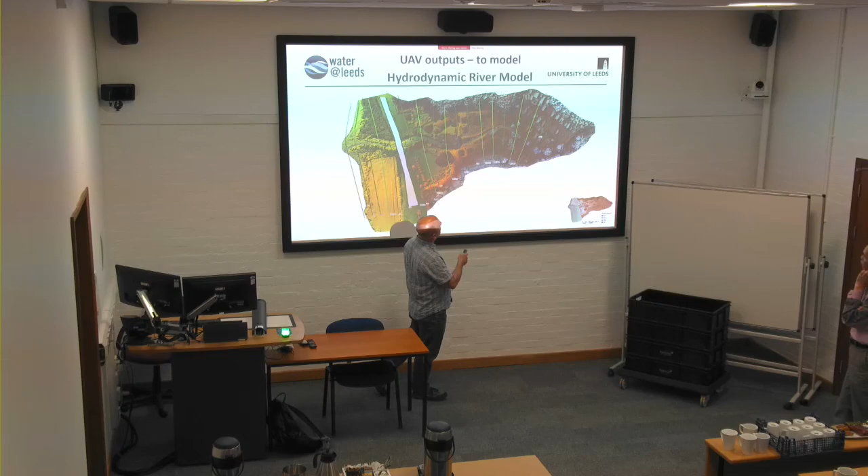But when we played around with one, not this particular model, we did play around with one of the other models, trying different arrangements of cross-sections, and we found it really didn't make any difference to the final bridge structure area. So you can see we've made an attempt here - I think the bright green ones are interpolated sections, so they're not so good, but most of the sections we put in are perpendicular, or we've got some dogleg in there.

Generally the flow runs parallel to the main channel, but once this fills up, it's essentially just flowing in that direction. So it doesn't really make a huge amount of difference. Okay, I'm just curious what thinking was behind it. Not that I know much about it, but it's just...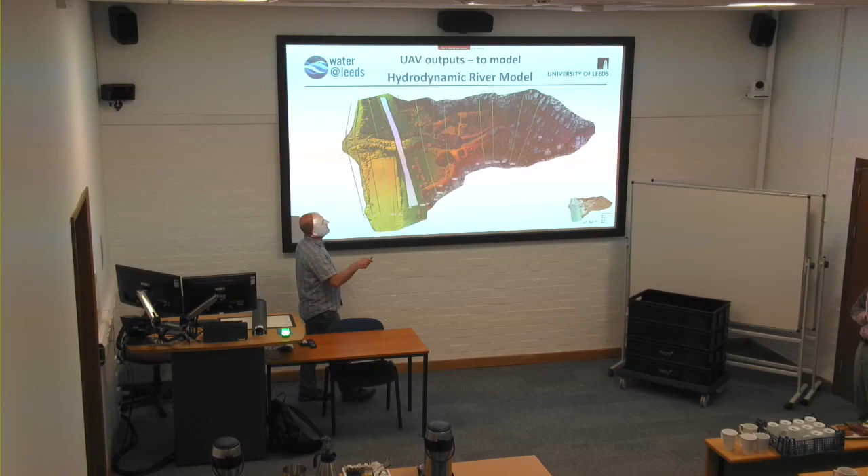No, it's a bit like choosing Mannings as well. It's one of those things you do as good modelling practice, but sometimes you find - I'm talking about choosing Mannings for each specific bit of the cross-section - sometimes you go into a lot of detail, and then if you just use a mean Mannings, you find it doesn't make a huge amount of difference. You have a channel and then a floodplain Mannings, perhaps.

What we've done since then is we've had a lot of students use this as a test case to develop 2D models. Since this, one of the things we identified was there wasn't very good topography data, and even this DSM wasn't particularly good. We had to do a lot of manual editing, so we recommended they fly LiDAR for the island. So they did - they've got LiDAR for the whole island now.

And so we've been able to reproduce this now in 2D with LiDAR data, which has been really interesting to see how well they match. Actually, you still get very similar results. So even with better data, I think it's a relatively simple hydraulic situation in terms of capacity. You've got a constrained river channel, I guess, that's got a huge flow in it. So it's not complicated in that sense.

Building a model, but yeah. Okay, and then if you just move to the slide with the longitudinal profile, which is the next one, I think.

Yeah, that one. So I believe I know what HEC-RAS is doing in terms of simulating flow along channels, but I don't know the details of how HEC-RAS calculates when you have sudden changes in the cross-section. Which is relatively simple, I would think, if it's all subcritical. But if it's very steep and possibly supercritical, how exactly does HEC-RAS simulate transitions including supercritical flow, pressure flow, overflow at the bridge location? How accurate is it? What data is provided for that?

So if we look at the bridge structure here, because we're looking at a whole range of flows, what we find is that HEC-RAS will use different routines depending on what the hydraulic condition is at the bridge at a given moment. It's essentially modelled as an energy loss, and how it calculates that energy loss depends on whether the water has reached the soffit, whether it's over the deck, and so on. It will use a different set of routines. So if it's open channel flow up until the soffit, then it becomes pressure flow through that orifice, and then when it goes over the deck, you get pressure flow and weir flow over the top. So it essentially starts adding complications to it. It's still quite a simplistic way of representing a bridge structure.

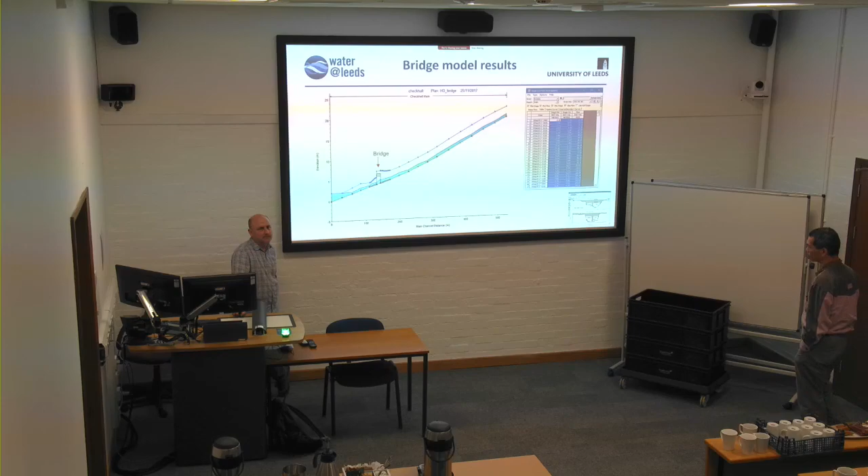To shed some light on, well, yeah. Part of your question, part of what you said is directly answering my question, which is that it does have different... it's not, how they say, simplified, which is... I'm just curious if it did have several different sets of equations to solve for different...

You even have choices amongst those representations as well, so you can choose different kinds of energy loss approaches. Some will be based on lab experiments done in the 70s and so on. So it's really interesting if you start digging into the story behind the choices that engineers are making. And often, interestingly, a lot of them don't realise there's that much choice, they just use the defaults, which aren't necessarily the best in terms of representing flow over a bridge, for example.

But in this case, I think most bridges in the UK would not be designed to overtop like that. You would avoid that at all costs, but every bridge overtopped in this case, so we had to try and represent that. The other challenge we had was there was no data to corroborate exact water levels or exactly what happened. And also we know that the channel filled up with sediment, so that changed the hydraulics, and we hadn't captured that. So actually the situation in reality was worse than we'd modelled, which is one of the interesting things - that's part of what I research now, how do you capture that dynamics.

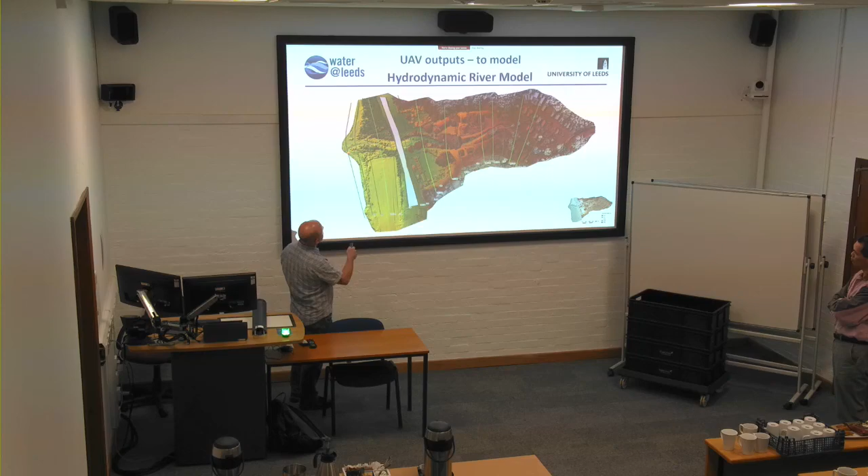So at this point, the bridge, this is the sea level here. This is quite close to the sea, and it's starting to spread out significantly. The channel widens quite significantly at this point. It's like a small delta. You can see it starts to widen out at this point here, and then, of course, reaches sea level as well. So there's a kind of complication there.

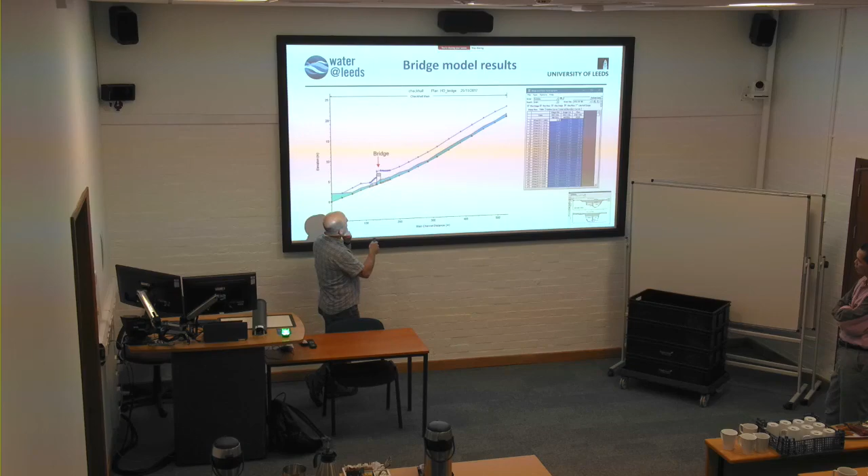This one we initially didn't run with this many cross sections interpolated. We were curious, like you, what HEC-RAS was trying to do with the bridge structure. So we threw in a lot of extra interpolated sections just to see if we could get more shape to that water surface, and it kind of made sense, I guess. That was the bridge deck structure. We had to make sure it represented the bypass flow as well, so we had to extend that structure out so that the weiring over the top was realistic. It's a lot easier now with 2D—you don't have to play around with that.

Yes, I have a question about the flood resilience in the city you've been studying. I'm wondering which aspect is most challenging in terms of flood resilience during the flood. Is it like sliding or structural failure, or even other aspects? What is it? That's a good question.

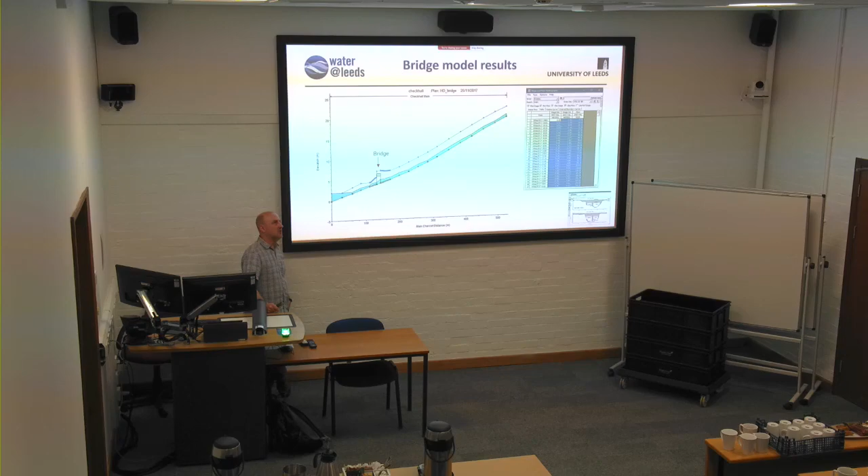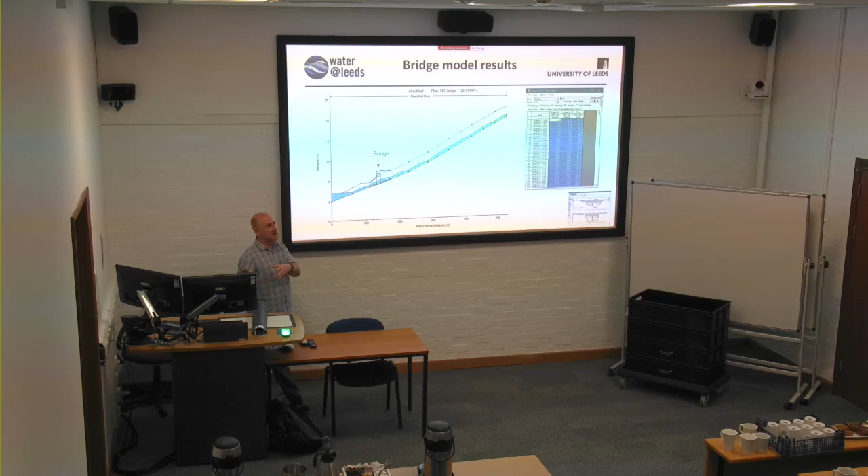I think each bridge had its own issues. The most common one, I'd say, is a mixture—where structures had failed, it was often to do with scour early on in the actual flood, and then deposition would often fill up, and some of the bridges disappeared under deposition. You couldn't actually see the bridge anymore. That caused avulsion, so the water has to go somewhere and it would carve out a new route to the sea. That would often end up damaging approach roads and communities and houses and everything, so it was particularly destructive. From a community point of view, the bypass flow was the most damaging. From a road network point of view, the scour and deposition of the bridge essentially disrupted that network, which was the main problem, I think, for access. So it kind of depended on the where, I guess.

And does the flood resilience have any effect? Obviously you've said there's the bypass flows, and I was curious if maybe increasing the flood resilience of a bridge will have any flood damage effect on the surroundings.

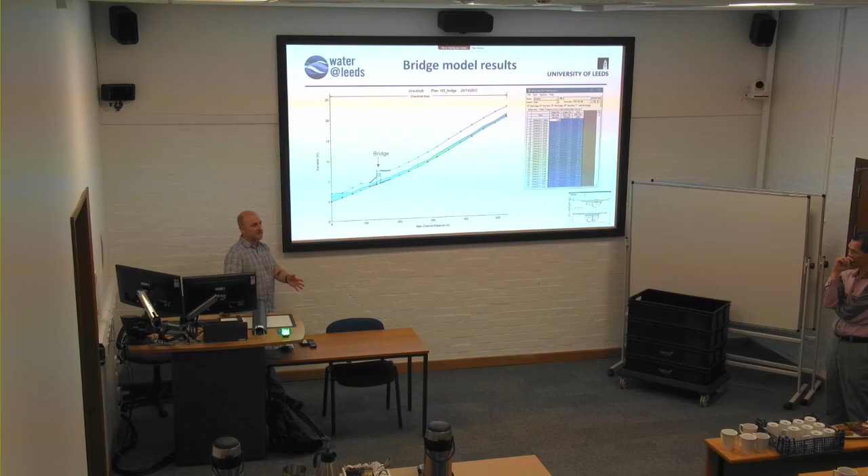Yes, that's a really good question, actually. I think that's quite incisive, because one of the things we looked at, as you're suggesting, is that if you make the bridge more resilient, essentially more flow then goes bypass through a community, and you can end up causing more problems. That's kind of why we suggested that you need to model the whole river system, bridge structure, and community as a holistic system and look at where that flow is going to go and maybe allow for that. For one of the communities, we looked at lowering one of the parallel roads to the river and essentially using that as a flood bypass, I guess. And even then, that's not been implemented, by the way—that was just something we were experimenting with, essentially making the bypass flow location more resilient as well as the bridge. So yeah, it's a challenge, I think, in terms of a designer, because often the bridge designer isn't interested in a community necessarily. It's not part of their remit when they look at their terms of reference for their consultancy role. They design a resilient bridge, but what does that mean? So that's kind of what we were trying to do—get people to think outside of that traditional design process that's quite formulaic, I guess.

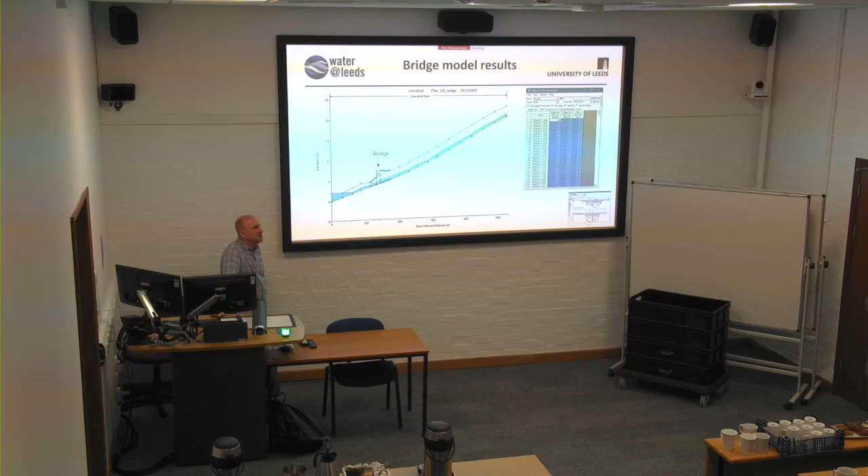And perhaps, while understanding these flows, is it better to implement a physical model and maybe build a small-scale city with the river and see how the flood reacts, instead of a digital model? Yeah, I don't do much in terms of physical modelling. It's not something I've ever done much of, so I'm not really the best person to ask whether that would work well or not.